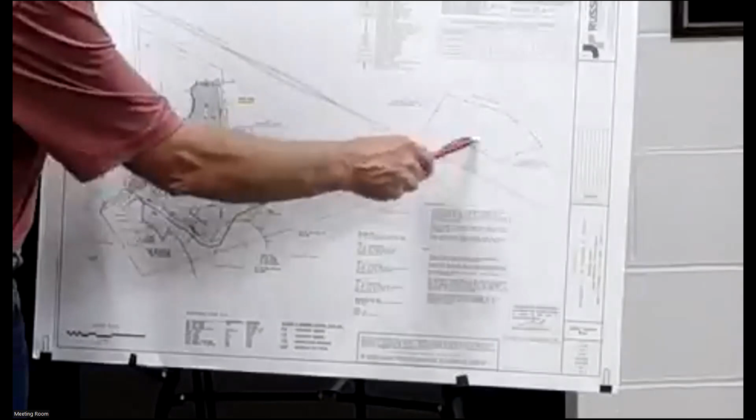And then there's another little piece out here that's owned by Doug and Angela that's isolated on the other side of the tracks. That gives them a little bit of frontage on Winkler Road.

Quite frankly, this was all part of the original Bora property, but when the Boras purchased it, it was after the rail came through, which was around 1915, or certainly the 1900s. It actually split the property, cutting the end of it off between Winkler and this parcel. So this is what's left.

It's about 6 acres. As you saw in the report, Rick Zulik did this delineation earlier this year, I don't remember exactly when.

If you look at the plan that I sent you, you'll see there's a highlighted blue line here. This is the limit of the actual wetland that he located. There's a couple of things going on here.

We basically got, for the most part, a wooded wetland located off here to the east, and again over here, slightly to the south. The area in the front, which is a designated wetland, is a narrow strip that's essentially a dug ditch. It was dug to create a connection between the wetland here, which is more of an open, ponded area. It's got wetland plants in it, but it doesn't have a lot of large trees like the rest of the forest area does.

It's got a pipe that takes the water out of this, heading to the west under Bora Road. There's a little brook that swings around over here, very close to the property line. There are 2 new pipes that the town just recently put in to convey the water from the brook under Bora Road and off to the north and west.

So essentially we've got wooded wetland, brook, wooded wetland, more of an open wetland here, 2 pipes crossing the road, and then what I'm going to call the man-made wetland of the ditch located here in the front.

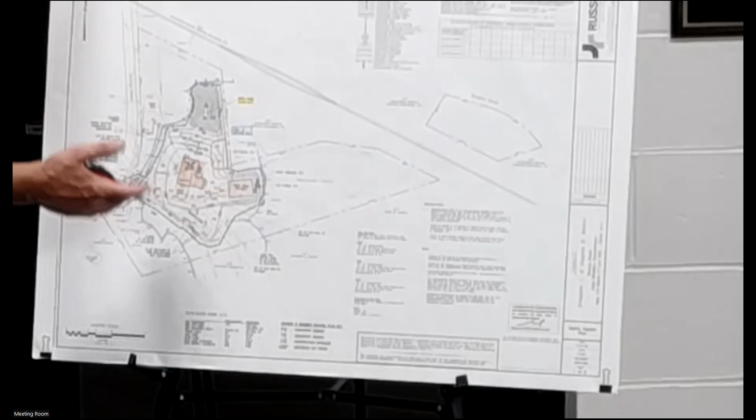It's again a similar piece of land, a very similar type of wetland - wooded wetlands - which basically surrounds this whole area: Warren Road, everything looking back to the east, back down towards Newberry, and even to some extent beyond Newberry when you get down into the industrial park. It's all kind of similar, same thing on the other side of the foothill.

But we're pretty happy with the way it worked out. We think we put a good plan together. We've got health department approval, a review from your town engineer who's comfortable with it, and we've got Rick Zulik who is also comfortable with what we've done. So all of that said, if anybody's got any questions, I'd be happy to answer.

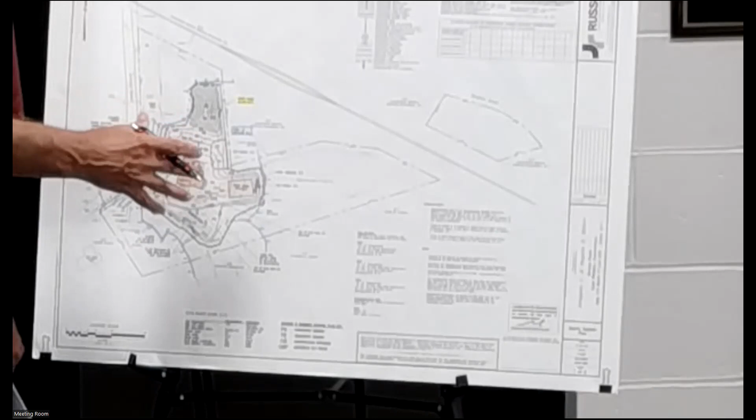Opening it up to the board for questions or comments. I'll start with one - it's hard to tell from here, but are you going to reuse the excavation material from the pond around the house? It looks like it's coming up a little bit. Yeah, it is coming up, and there will be some fill required around this, and it's good sandy material - you're exactly right, you'll be able to use it. That works well.

You're going to have a little deep pond there. It has some depth to it, which creates diversity. The one thing it will do is provide some open water - like when we do a detention basin design where we've got a planting shelf, but then typically a water quality volume of 4 to 5 feet of depth in the middle. When you get that kind of depth, you don't get the vegetative growth - no cattails, no phragmites, you get open water. And very likely you're going to get fish - it's just a matter of time before the eggs get in there, and probably Doug and Angela's grandkids will be fishing or something. I'm guessing, but we'll see.

Is it going to have a berm around it? No, it's basically just an excavation in the ground - no berm, I don't think you want one there. No, I agree. A little damp there sometimes.

Any other comments or questions from the board?

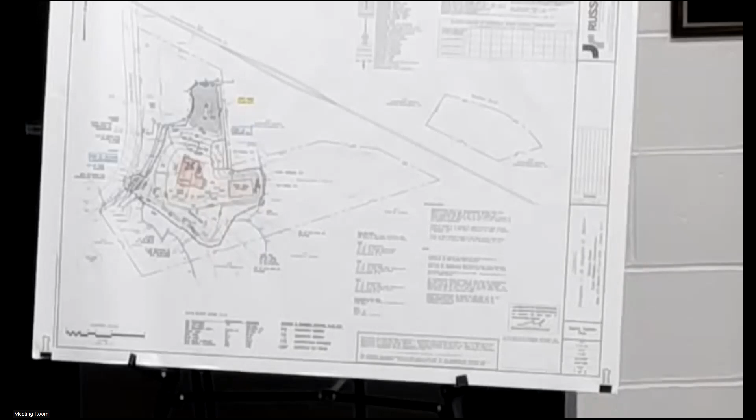Make a motion to approve IWWA number 11-2023, permit to construct activity in a regulated area, Bork Road, no assigned address, owners Douglas J. and Angela E. Miller, applicant J. Usury for J.R. Russo Associates, construction of a new single-family home with a barn and a pond in a regulated area, map 114, block 17, lot 016, zone A1, with the standard conditions 1 through 14.

Let's start and close. I'll second that. Any further discussion? Hearing none, all in favor? Any opposed? Nope. Thank you, you guys are all set. Hopefully the well will be shallow.

Moving on, we have no continued public hearings, no new business, no old business, so moving swiftly along to miscellaneous. We have to review our 2024 schedule of IWWA meetings. Are there any issues we need to resolve, or is everything good as presented?

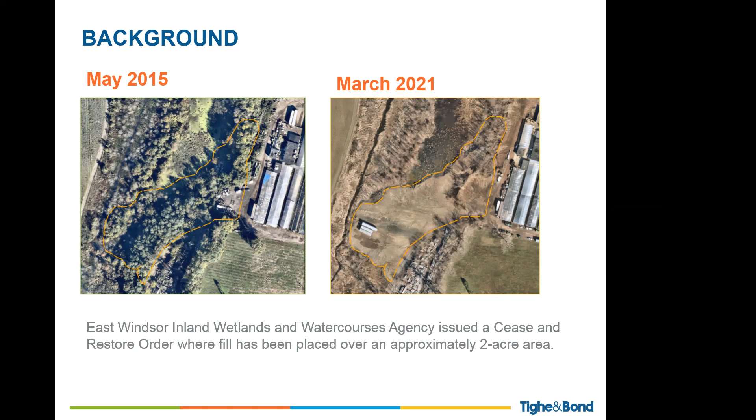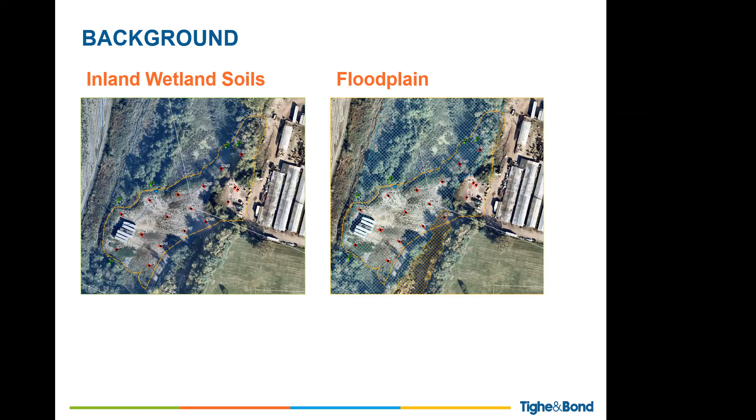On the left here, we have an area overlaid with the inland wetland soils that have been mapped for the state of Connecticut, and on the right we have the mapped floodplain. So the fill is within an area mapped as inland wetland soils and as a floodplain. This is a violation because it did not receive permitting or approval for the appropriate floodplain and inland wetland regulations, as well as the U.S. Army Corps regulations under Section 404 of the Clean Water Act.

Tighe & Bond actually did a forensic soil investigation, going out to test pits, which you can see are all those little red dots labeled TP with a number. Those are test pits to look at what constitutes the fill and characterize what the fill material consists of. Based off an average depth of fill of about 8 feet, approximately 26,500 cubic yards of fill is present. The fill is primarily sand with silt, gravel, and construction and demolition debris. There's also elevated concentrations of several contaminants above the Connecticut remediation standard regulations. Based on the size of the site, it meets the definition of a solid waste disposal area and is in violation of the Connecticut solid waste regulations.

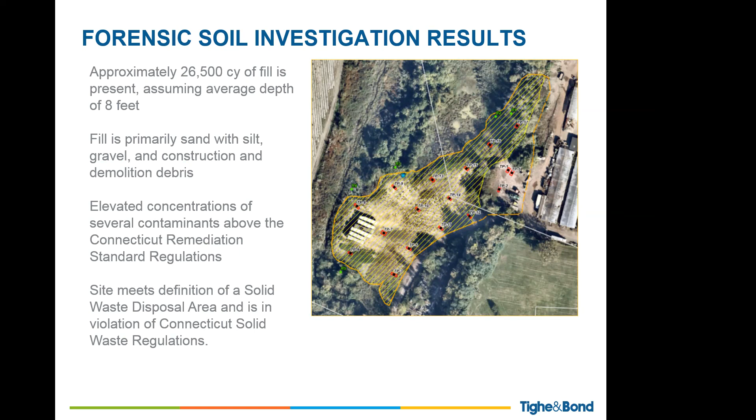As a result of this fill, it has impacted wetland functions and values, resulting not just in a loss of wetland area, but in a loss of wetland functions and values. So what are those ecosystem services that wetlands provide? For this site, the functions and values impacted include groundwater recharge and discharge, soil infiltration, and the ability to discharge to nearby wetland and stream. Flood flow alteration—this is fill in a floodplain, resulting in a loss of flood storage. Sediment and toxin removal—fill is contributing sediment and toxins directly to adjacent wetlands and watercourses. Nutrient removal—due to destruction of vegetation and fill, the wetland is no longer removing nutrients from the surrounding landscape, as well as wildlife habitat. Vegetation removal and the fill have led to habitat loss for wildlife.

The goals and objectives for the wetland restoration plan are really 3 main goals: fill removal, wetland restoration, and stream restoration. First, fill removal—we want to ensure the contaminated fill is removed, handled, and disposed of in accordance with all applicable environmental laws and regulations. Second, wetland restoration—we want to restore the impaired wetland functions and reestablish the pre-existing forested/scrub shrub wetland that was present. Also stream restoration—we want to restore hydrologic connectivity to the unfilled stream adjacent to the site, as well as restore flood storage capacity, since this site is within the floodplain.

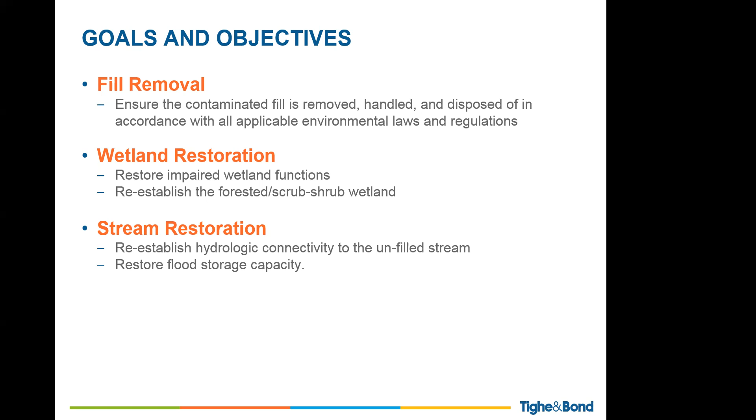First, for fill removal, what needs to be done is develop a remedial action plan. Additional soil sampling may be required to accurately assess the depth of fill. While we assumed an average depth of 8 feet here, that's only based off the test pits that Tighe & Bond has performed, but additional soil sampling and test pits may be required to accurately characterize the full extent of the fill.

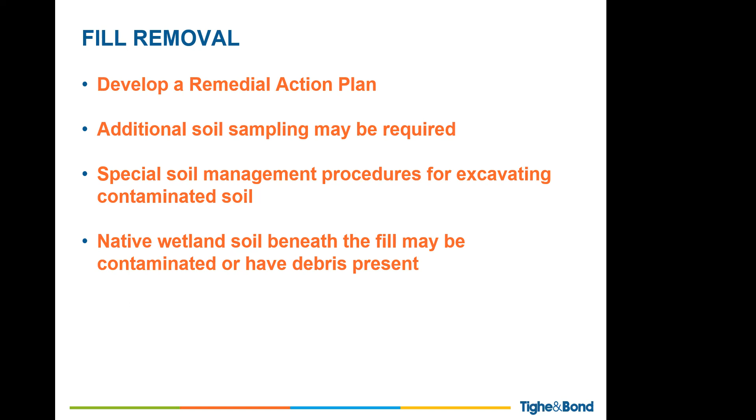In regards to fill removal, special soil management procedures for excavating contaminated soil are required, since there are several contaminants in the soil that will require special attention. Also, native wetland soil beneath the fill may be contaminated or have debris present. These are things that will limit the potential success of wetland restoration. It's not just removing the fill, but also what's underneath it that needs to be taken into consideration for successful wetland restoration.

After fill has been removed, one thing I think is really important to look at is stream restoration. We really want to reestablish flood storage capacity as well as hydrologic connectivity with the adjacent stream that flows out to the Connecticut River.

As part of stream restoration, it's not that easy to just go in and dig a channel, especially at this site, because of the nature of the fill as well as the location. That's why further investigation and analysis are necessary for a successful design.

Those analyses include a hydrologic analysis, which would characterize the historic flow regime—what did it look like before it was filled? Also a geomorphic analysis characterizing the historical channel: how wide was it, how deep was it, was it high flow or low flow? That leads into a hydraulic analysis, characterizing the interaction between the flow regime and the channel.

We would also propose a sediment transport analysis, which would characterize the role of sediment transport. This is incredibly important given that this site has fill in it, so this analysis helps characterize what the sediment transport role was before the fill. Also a geotechnical analysis, which would be important not just for stream restoration but also for wetland restoration and fill removal, and would be helpful for characterizing the extent of bank erosion as well as soil stability.

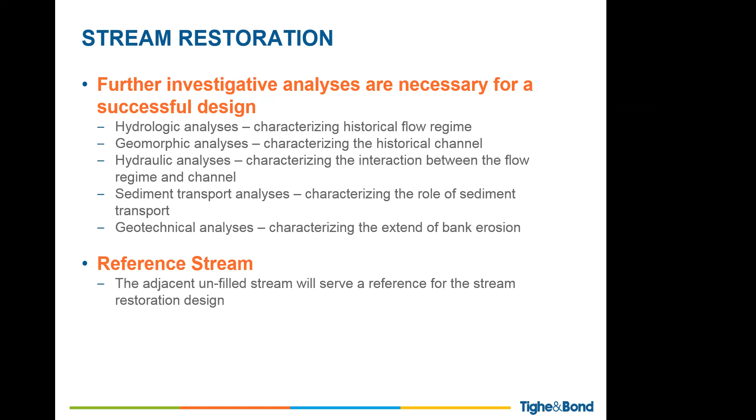Moving on to wetland restoration, after the fill has been removed and a channel successfully established, it would require regrading the rest of the site to pre-existing topography. We have existing LiDAR of what the site looked like before fill. I would recommend a topographic survey be done for existing conditions, then compared to pre-existing conditions to see where regrading is needed.

After it's been graded, apply at least 12 inches of topsoil with high organic content. This depth and high organic content is required for the success of wetland plantings. The next step is to plant native trees, shrubs, and herbaceous plants to restore the pre-existing scrub shrub forested wetland, selecting plants that would do best on a hydrologic gradient from wettest to driest.

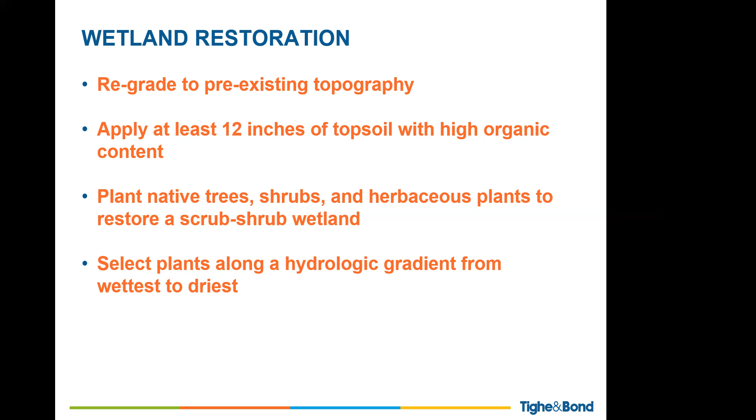Talking about the wetland planting zones, we've come up with a draft diagram I'll show shortly, but it breaks the site into 3 zones from wettest to driest within the wetland restoration area.

Right next to the proposed stream restoration is a riparian buffer, which would provide stream bank stabilization. Plants here must tolerate permanently flooded conditions, including black willow, buttonbush, and sedges—your obligate wetland plants.

Zone 2 would be further upslope, an irregularly flooded zone. Plants must be adapted to moist soil conditions and tolerate some flooding. I would recommend vegetation such as swamp white oak, dogwoods, and sedges—more of your facultative wet plant species.

Finally, at the uppermost end of the gradient would be a rarely flooded zone. Plants here must still be adapted to moist soil conditions, but don't need to tolerate flooding. For this zone, I'd recommend red maple, chokeberries, which are also very good for wildlife habitat, and gray dogwood—more of those facultative plants.

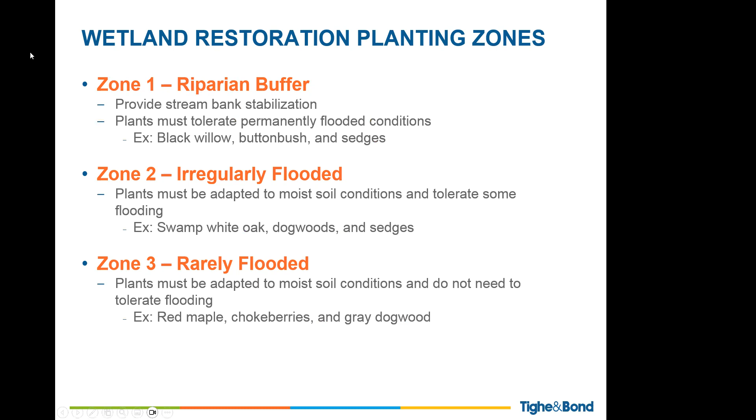Just to show you a conceptual cross-section of what this would look like on an elevation gradient: on the left, you can see an area that is permanently flooded. On the first image, the cover image, you saw an area permanently flooded in the middle of winter. Right next to it would be zone 1, that frequently flooded or riparian buffer. Moving upslope, zone 2 is irregularly flooded, and zone 3 is rarely flooded. All that would constitute the wetland restoration area.

I should also mention that the elevations provided here, from 20 to 30 feet AMSL, are just based off of aerial imagery and topos. They're not based off any survey grade. This is not an engineer-ready bid diagram, just a conceptual drawing of what that zonation would look like. But as you can see in the illustrations, it would include a variety of trees and shrubs along that gradient.

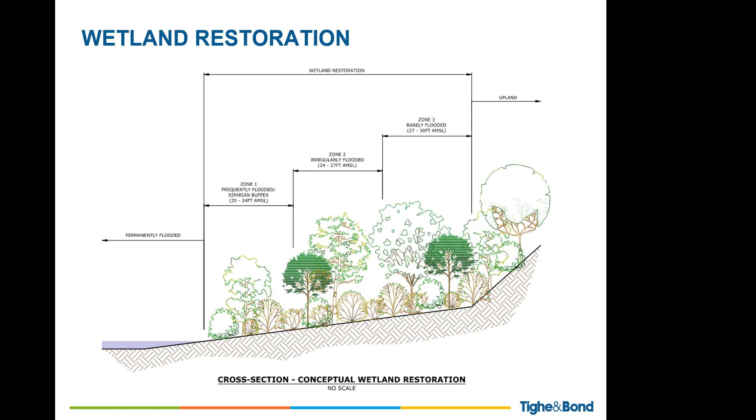After additional analyses, studies, surveys, and an engineering design have been done, this might look a bit different. But for the purpose of what a wetland restoration plan should look like, it should include a degree of hydrologic variability on that elevation gradient.

Based off pre-existing topo, it did appear that right along the edge, where there's some area with parking, there were steep slopes. So that would be an area to focus on in terms of bank stabilization, and wetland restoration there might be limited just based on the pre-existing topography.

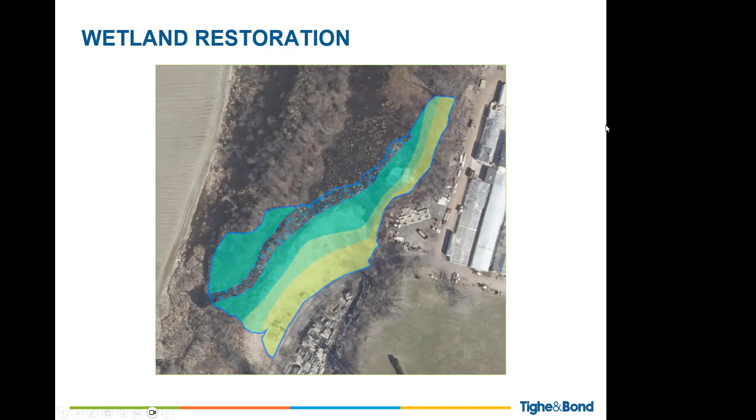To make sure the wetland restoration plan is successful and actually exceeds expectations, performance standards are necessary. These performance standards are twofold: fill removal, and wetland and stream restoration. For fill removal, it's really important to engage Connecticut DEEP for guidance on what performance standards to use.

Rick, do you have any input on what would constitute performance standards for fill removal? Sure. So typically what you'd do for sites where you're trying to determine how clean is clean, where do we stop, what constitutes a successful remediation - in this case we'd go back to one of the things Matt opened with: additional work to determine the depth of material and impacts. We don't necessarily have a vertical limit on the contaminants present in the fill. That would likely be necessary in order to determine where our endpoint is.

So typically in Connecticut it's the remediation standard regulations. There are numerical criteria based on human and ecological exposure risks, and they're published and guide most, or all, of what we do in Connecticut with respect to the cleanup of contaminated sites.

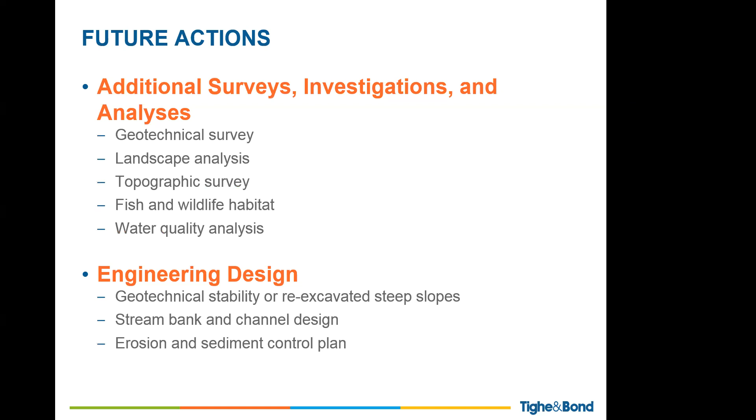And finally, with all this restoration work and ground disturbance being done, an erosion and sediment control plan. So with that, that wraps up the presentation.